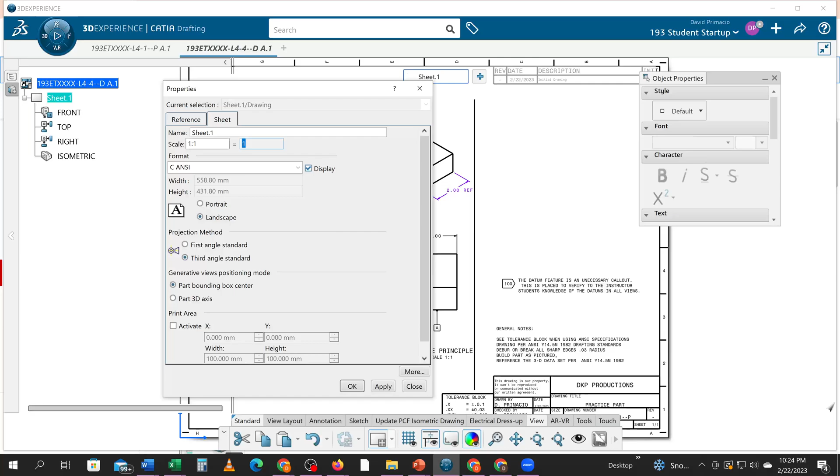I don't even know if a D-size drawing will cover it. But if I was going to do that, I would go to Properties under Sheet 1, and then I would pick this tab called Sheet, and below that it says 1 to 1. I would just change that 1 to a 2 and hit Apply.

Did that not change? I guess I got to change it here. So I change that to a 2. That's twice scale. Hit Apply and say OK. Whew, what a mess that makes. So the border is too small. So if I want to get a bigger border, I'm just going to delete this one, I don't need it anymore.

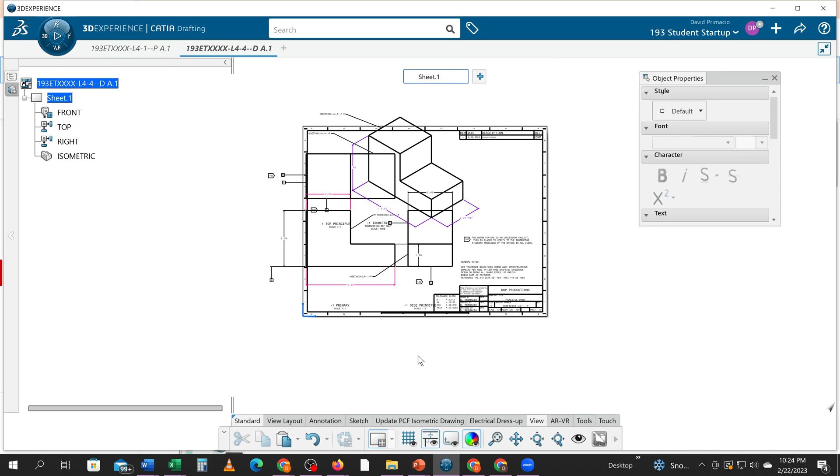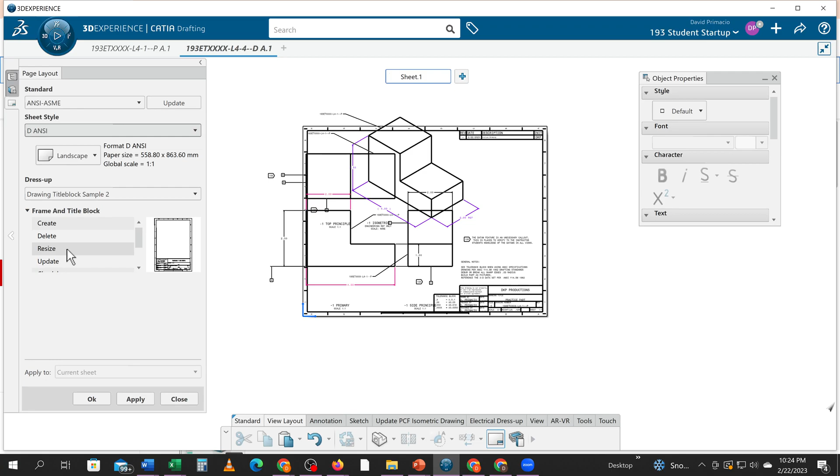I can go to view layout, and pretend like I'm just going to insert a new border the way I've shown you before, except that I'm going to change this to a D size from a C and hit resize and hit apply. It's thinking. It should move everything over. It's kind of slow to do that.

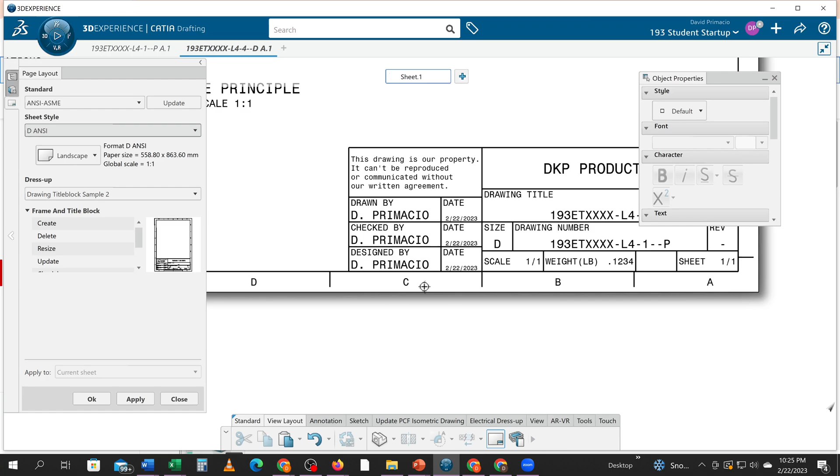The thing I don't like is it didn't know to move the tolerance block and the general notes very well. In my note, oh, here's another thing too, it switched it back to 1 to 1 scale. That's 1 to 1 scale. So I gotta say okay to that.

And then right click on sheet 1 again and redo this to change it to 2 to 1 scale. So I change that to 2:1 and hit apply. And it will say okay.

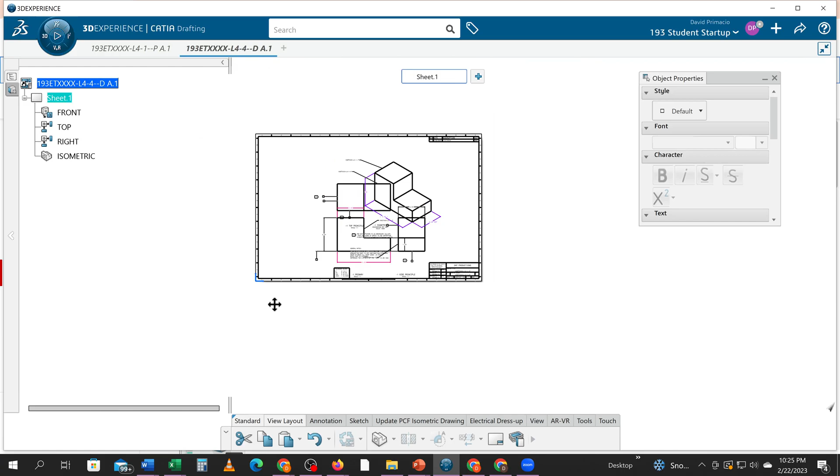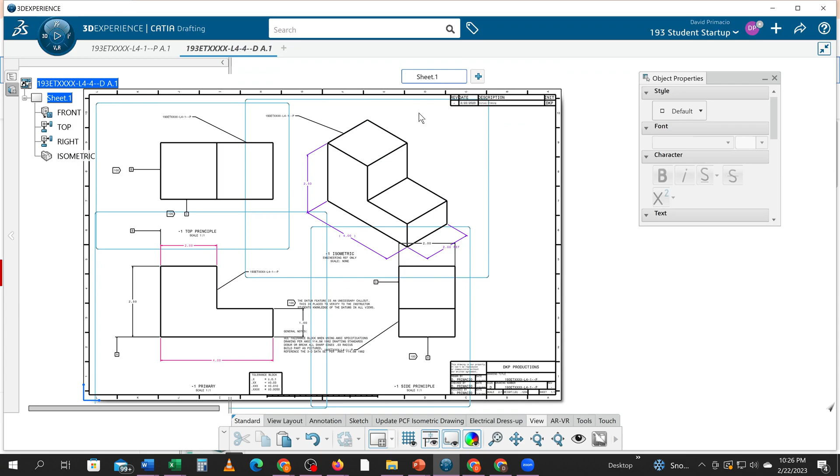And I'll turn my view frame back on. Move this out. Move this up. Move this ISO view up a little bit. Oh yeah, move it up quite a bit more. Got to move this over. I moved over too much.

Okay, turn the frames off. And then you can see I got to edit the background, so I got to move all this text around. I'd have to just kind of manually grab these and shift them around. Got to grab this tolerance, move it over, move it over, move this block.

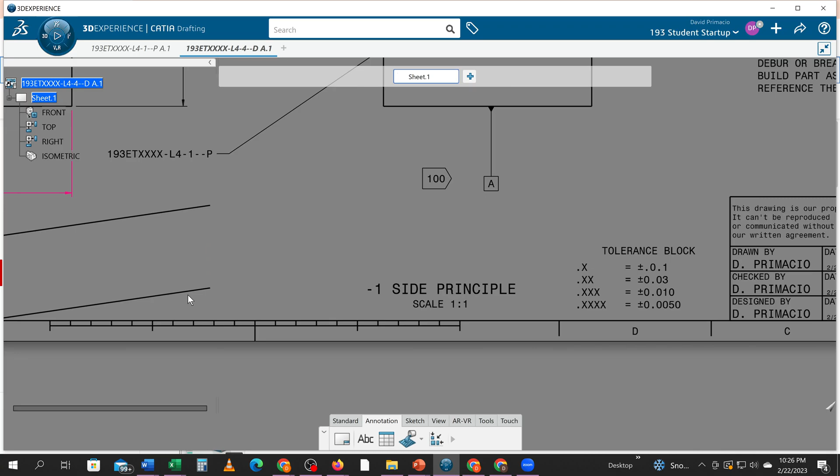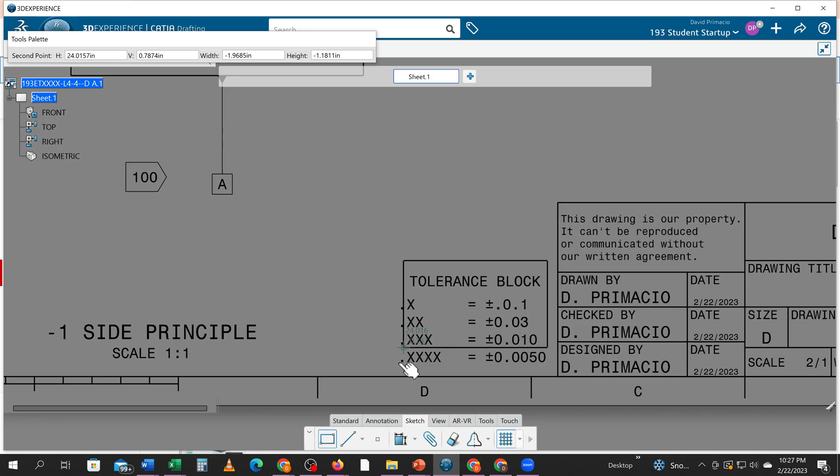Oh, you sucker. It might be just as easy to delete that block. Move this over, move this over. Under sketch, just create another rectangle. Okay, ideally I would have lined that up. You get the picture there.

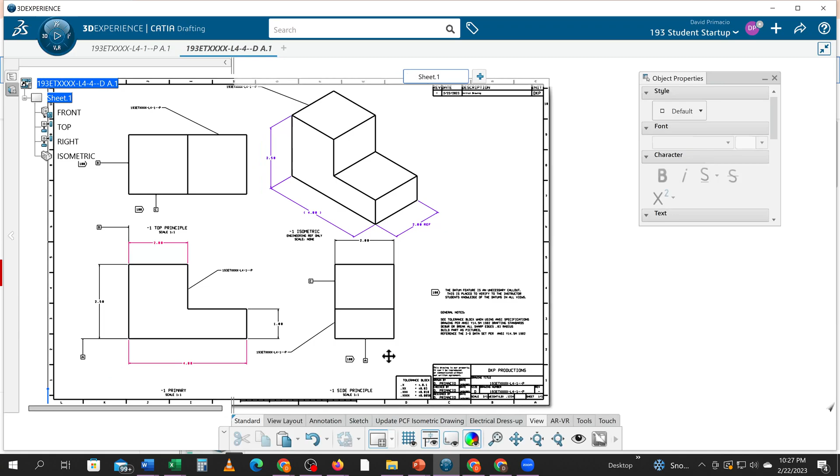So you got, when they do that, you got to move a lot of stuff because it just spreads everything out twice what it was. So I got to shoot all these back down. So I got to go back to the edit sheet, or I can move this back up, so I can move this closer. So it's a lot of moving stuff around here.

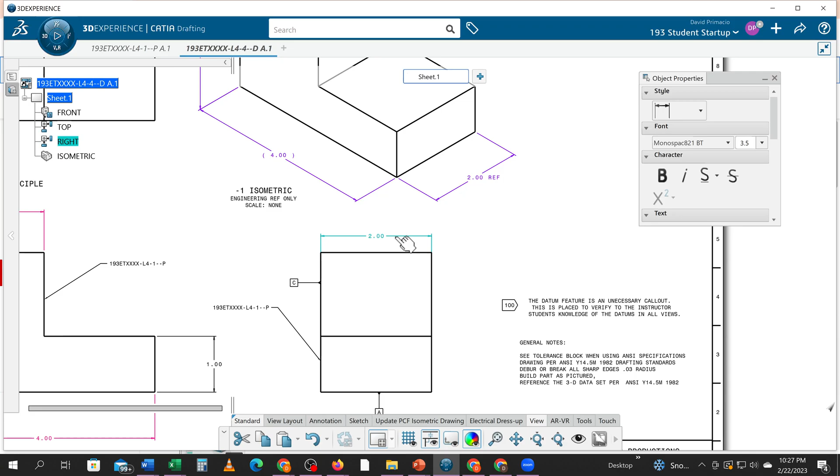And you'd have to do that on all the views because all of them are twice whatever they were. So if you had this half inch off the part, I'm now 1 inch off the part. So you got to go through and move all those views.

But when they go to print it, it's gonna be a lot nicer for them because this is a nice full drawing. All the scale, all the views are easy for them to read. The idea of making the drawing is trying to make a drawing for the shop to make something with, and you want to make it as clean and easy to read for them as you can.

The other reason we created a drawing is because it's a legal binding document that holds us accountable and holds the shop accountable. We're accountable for the design, and the shop is accountable for building it per the specs on the drawing. If a part fails, the first thing they look at is the drawing. Then they look at the part and see if it was built to the specs. If the part was built to specs, engineering is in trouble. If the shop didn't build it to engineering specs, the shop's in trouble.

Okay, so that's pretty much all I have to show you about drawings. There's one last thing about doing the checklist.